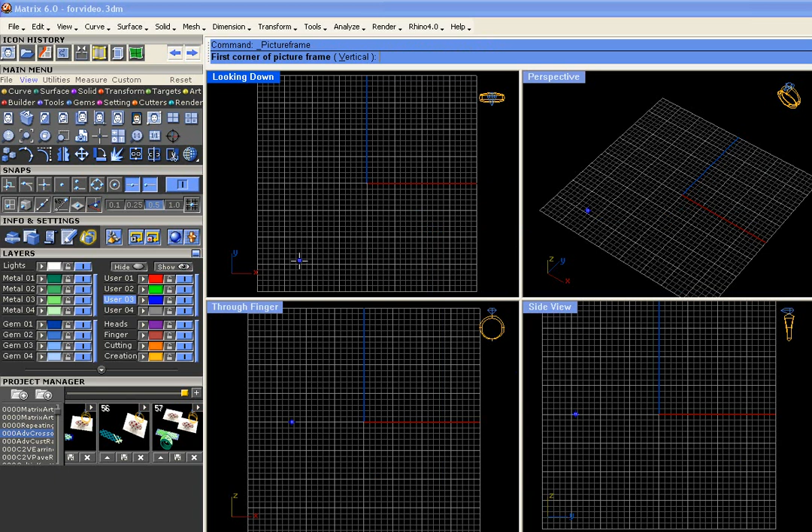Once you've found that image, hit open, and the next thing will be to click Shift and drag the bottom edge of that photo along. Then you'll be able to center this and scale it to the size of the actual ring so you get some idea of the size this should be.

So let's begin with the finger size, the finger rail, and then we can center this on the finger rail about 2 millimeters past the edges of it. That's actually not so bad.

Or if you prefer, you can just click and drag this off. The picture frame is a great tool to use because you can just pick up the surface and drag it around.

The only thing is I like to put it on a layer color I don't use a lot, such as lights, and then lock that layer. That way I can't accidentally select it.

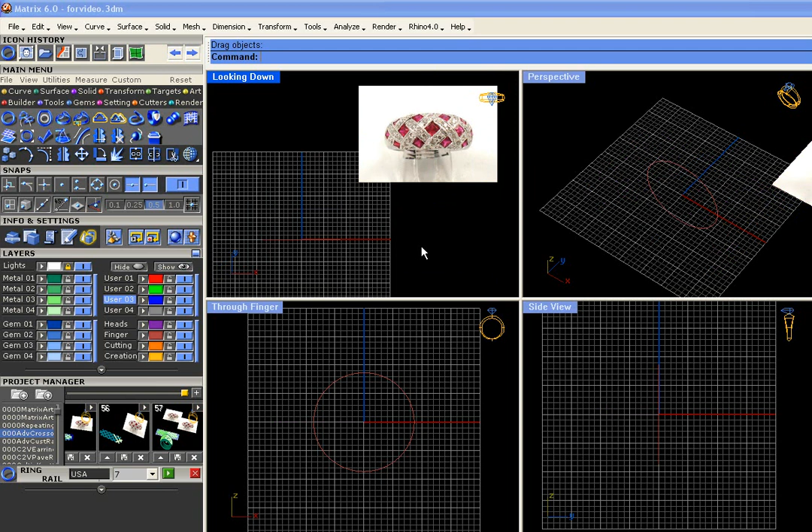To begin creating this, let's draw the taper for this ring in the side view. To start, I'm going to just place the curve tool line with the both sides option right at the inside of that finger rail.

As I hold down Shift, I'm going to drag this out to the width that I want at the bottom of the ring. I want it a little wider actually, so right click, both sides, click and drag that out.

The next thing is going to be to create this taper with the line tool. Just click into the end right here and extend it pretty far up past the top of this to the width you want for the ring.

F4, Shift. I just mirrored that to the other side using F4.

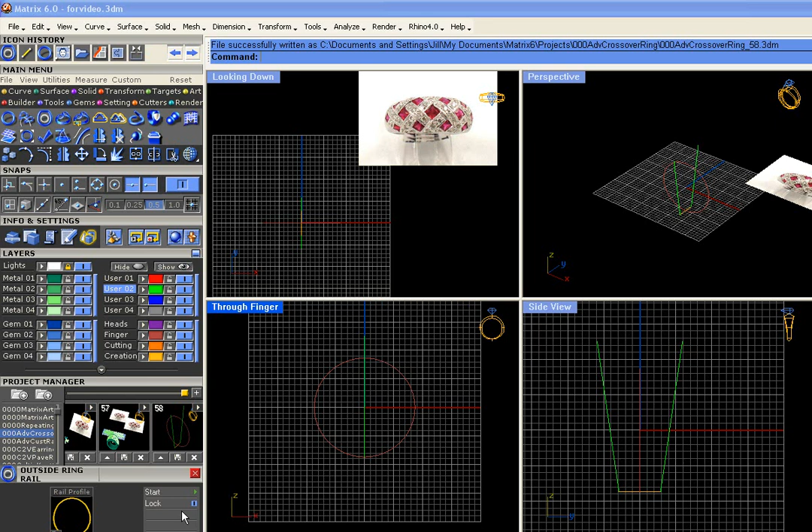The next thing will be to place the outside finger rail here. With the outside rail tool, just hit start and you'll get all the handles for that. We're actually going to just create the side of the ring using this.

So we're going to draw this up to 1.5, this down to 1.3, and the bottom up to 1 millimeter. Holding down Shift, you can get those right on. Okay, press Enter to keep that.

Using Curve from Two Views, we're going to be able to place the outside and inside finger rail on an angle with these two curves.

Before we do that, as you know, these curves have to extend down past the end of this rail, which they don't yet. So we're going to run the extend command. That lives right here in the curve menu. Just press Enter for dynamic extend.

We're going to extend this guy and this guy. What happened there is Rhino history is turned on, so when you extend one curve that has been mirrored, its mirrored copy also does the extend. So we can turn that off - it sometimes messes with matrix history.

Let's job bag this. Alright, Curve from Two Views is going to give us two curves that match the angle of the green lines there.

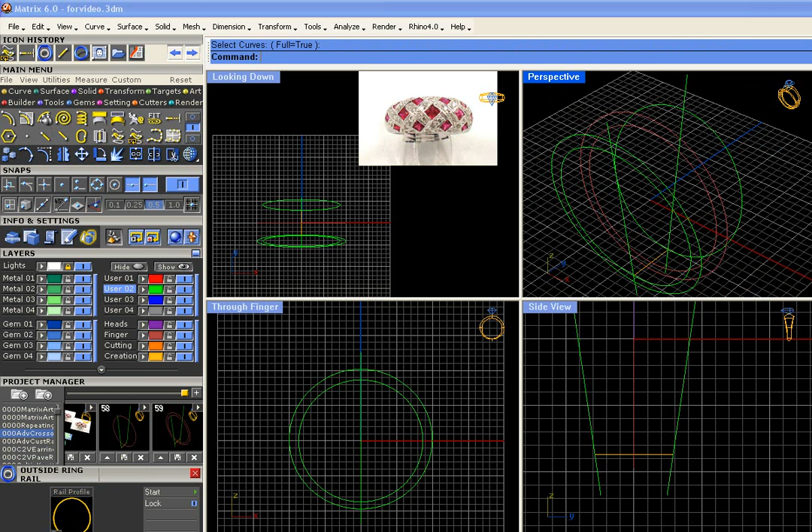So let's run Curve from Two Views with history with the inside finger rail and one line. Repeat the inside finger rail and the other line. Repeat the Curve from Two Views with the outside rail and the line, and one more time with the outside rail and the line.

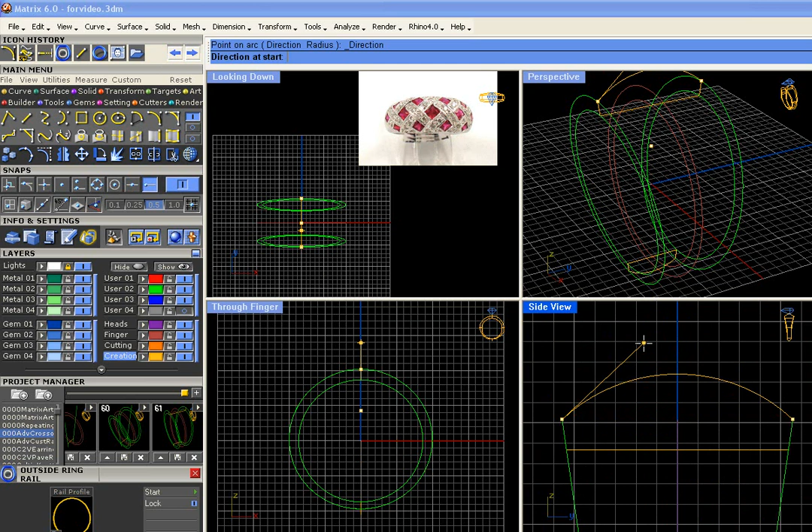Same thing at the top. Between the end and the end, we should have an end in there. And just draw that up as high as you want. In this way we can create a different curvature at the bottom as at the top. We want this to really poof up more at the top. In fact, we could even do that a little bit more and really get that thing tall and puffy at the top.

Okay, job bag this. Notice that we didn't join these profiles together. We're all ready to sweep them in 4 separate sweep 2 operations. This is exactly what multi-rail sweep does, only we're going to control it so that we get 4 separate surfaces in the end. So sweep 2 between the 2 rails and the profiles that touch them.

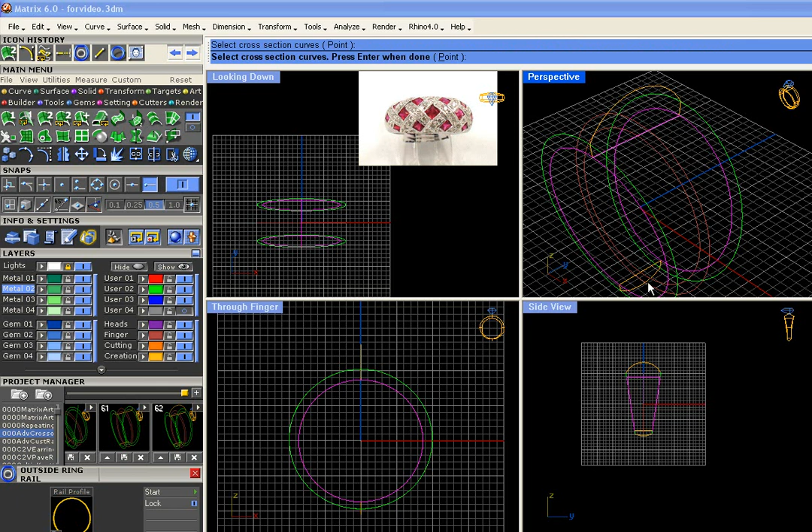Oh, we can mirror the whole thing afterwards anyway. Sweep 2 between the 2 rails and the profiles. We can mirror this guy. F4, shift. Sweep 2 one last time between the 2 rails. Sweep 2 between the 2 rails and the profiles that touch them.

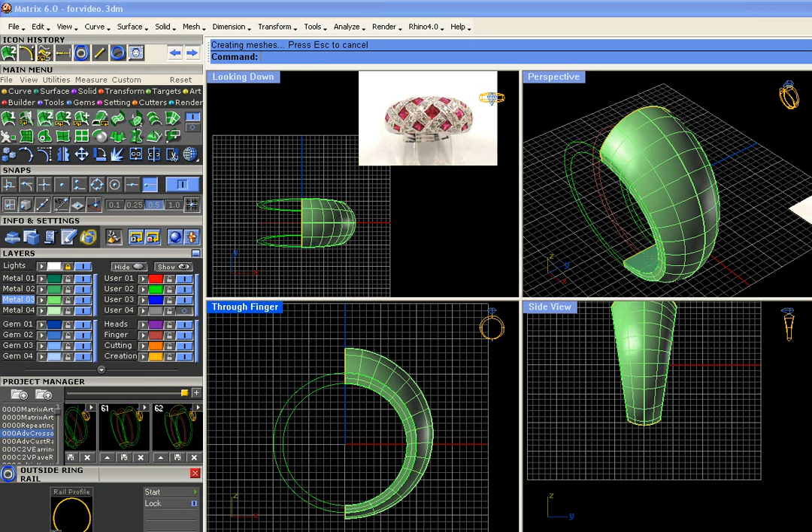Okay, you can see the really nice shape of that. And we can take all these surfaces, join them up, and mirror them to the other side of the ring. F4, shift, and join everything together. It should create for you a closed solid poly surface if you join the inside. I forgot to mirror and join the inside.

Join your closed solid poly surface. Okay, get used to that. We're going to be checking for that a lot during this tutorial. It's a pretty tricky one.

Remember how I said I like to keep those curves around? Let's bring them back right now. They're right here, and we'll offset them to create a shape for the inset surface that all this stuff is going to go onto. Let's offset these one at a time. If you're not sure exactly how far you want them, just use the 3-point option, and when it looks good, click.

You can either mirror this or just offset the other one. We'll mirror it, and we'll put them on another layer color so you can see them really well. Cutting layer. Also determine how far down the ring you want that little surface to end.

With the line tool, and making sure project is turned on, because we're going to draw this straight, flat in the viewport, just draw about the shape for that. Notice how it comes to a V here on the side. Trust me, it comes to a V on the side. And go ahead and mirror this one, F4, shift.

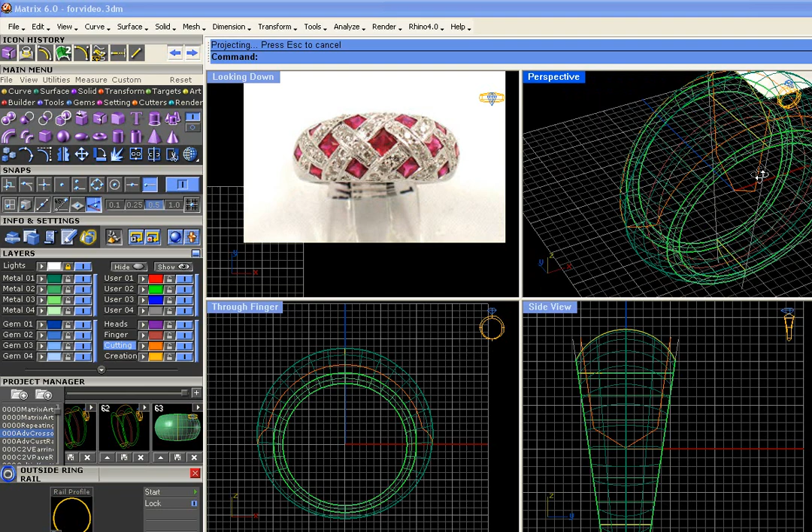In the side view, we're going to run project, grab our orange curve, press enter. The surface to project it onto is this green one. Press enter, and there we go. You can see that it projects around the entire surface.

We're now going to split the green surface with the orange curve. One surface has been split into two pieces - there's one piece and there's the other. Let's take that first piece and put it on a new layer color so we can get a good look at it.

Now we're going to scale this down in order to create the inset surface. Let's select just this surface, run the transform command, scale 2D, and then looking down from F4, we're just going to click shift and scale this down a little ways.

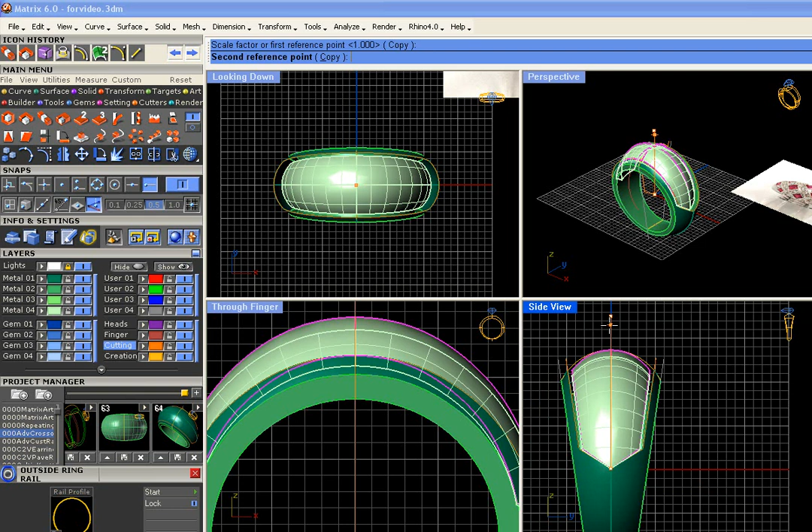Notice that it's scaling it smaller on the top and the sides, which is good, but the very top of the surface is still all the way up at the top of the ring. So we use 1D scale from the end snap and just scale that down, making sure you're holding down shift so it doesn't make things go out of whack here.

Then just depending on how you want this to look, you can finagle it a little more. We're just creating an inset that all this stuff is going to be put onto, so all this stuff is going to be just about planar with the top of that ring, so you're not going to see this really weird shape on the side. Of course, you don't see it here - we're just making a surface to flow this whole design and lay these gems out on, so you don't have to really worry about that so much.

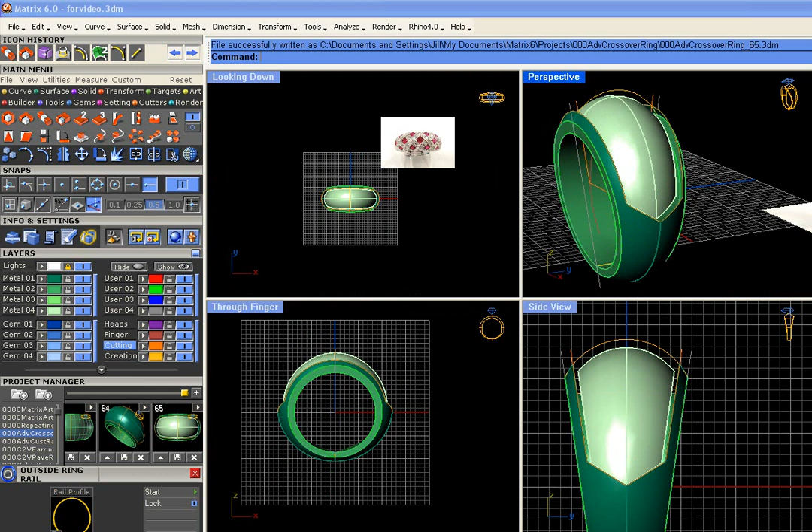So let's leave it all uniform there. Let's job bag this. And to create this as a solid model so that we don't get all lazy here, we're just going to close it up with the loft tool.

So with yet another layer color, go to the loft command and just work your way around the edges that line up. Okay, and we'll go around this whole ring, lofting between these edges. Oops, not that edge, this edge.

Okay, I'm just going to pause the video while I do this because it's boring. Oh, that was so boring. I almost put myself to sleep.

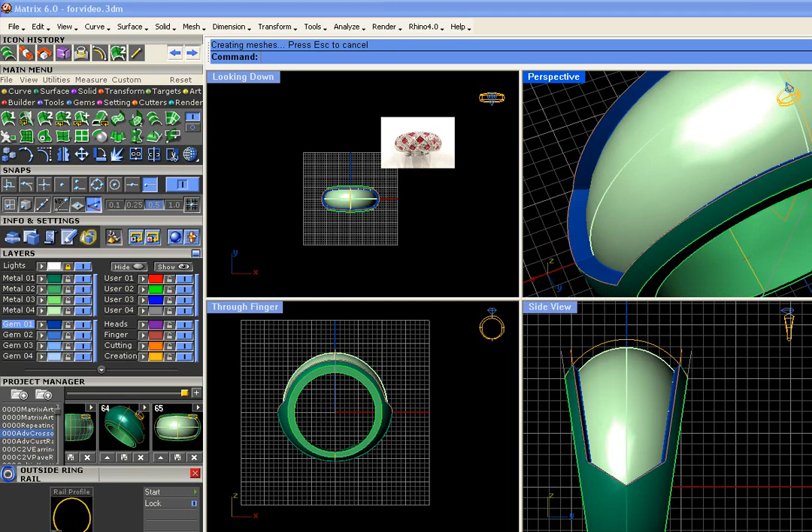Okay, so just notice that all the edges are lofted - they're little surfaces. Just don't get lazy and mirror these; make sure you build them all because you want this model to be solid in the end.

So let's grab all these, and all these. Does anyone else have trouble telling between those two shades of green? And join.

Okay, we're definitely missing a green. Join. And check it out - it's closed. That's good to know.

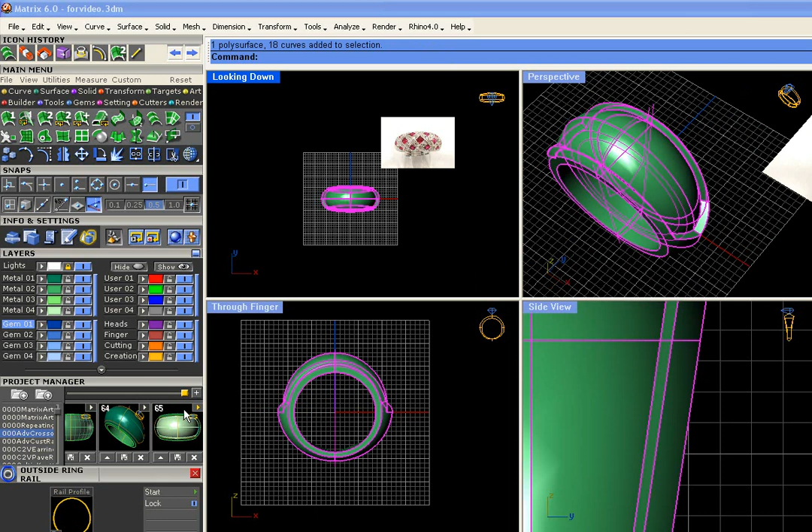And we'll job bag this. Okay, however, this is not the surface that we're going to flow this design onto, because we need an untrimmed surface for those little UV curve commands, and this one has been trimmed.

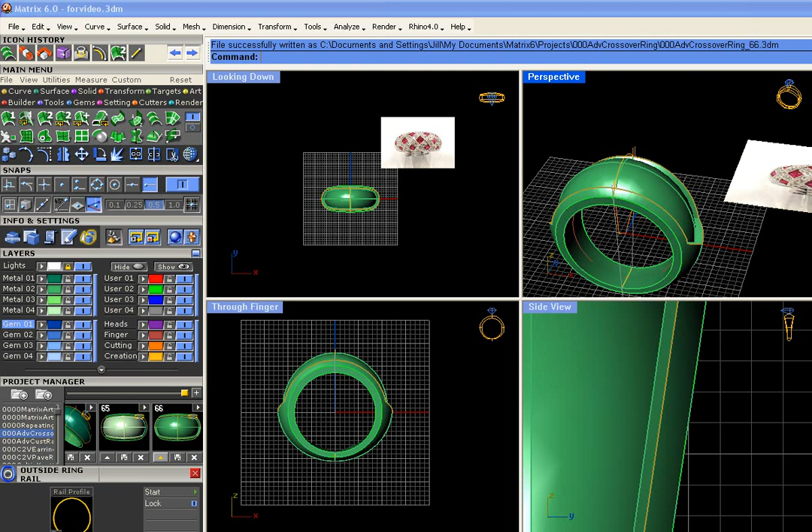It's been split, moved around, scaled. The split did the trimming, and it's just got no recollection of its original - how it's got no relationship to how it was originally created. So we need to create it anew, kind of here.

Okay, so we're going to do that. How are we going to do that again? We're going to do that by extracting the surface first - something we haven't used yet here. Extract our surface. And remember, we have four, so even worse - UV curves would not like that. Okay, extract them. Enter.

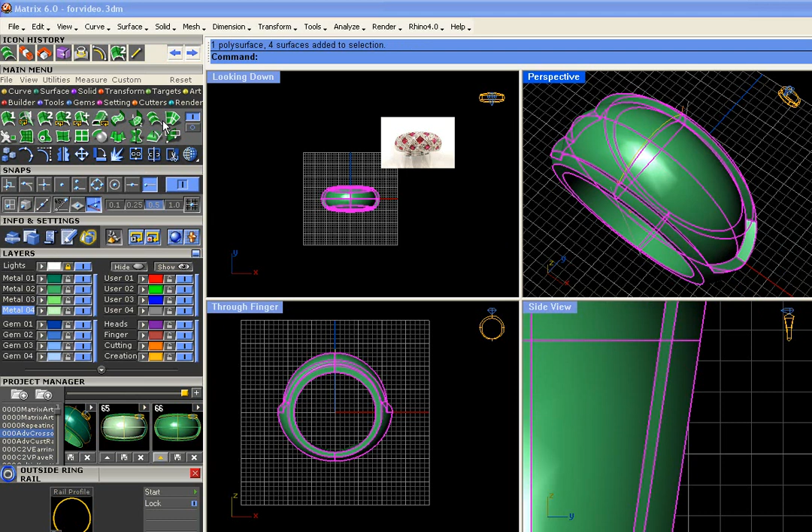We're going to run the dupe in place trick again. In place - we're going to take one copy and stick it on this color. And the other copy, let's take them and join them. And the other ones we're going to join up and create our poly surface again.

Okay, so we've got our ring kind of untouched there, and we've also got the surface that we're going to use to build the new surface. So let's turn off the ring.

Oh, we've got a bunch of curves all hanging around out there. I like this super select tool - we can grab all the curves now that we're done with them, put them in a job bag, and dump them. We're not going to need them back.

Okay. We could also put this guy in a job bag all by himself, just in case anything happens and we crash.

And I think we've job bagged the whole thing. Am I paranoid? Little bit.

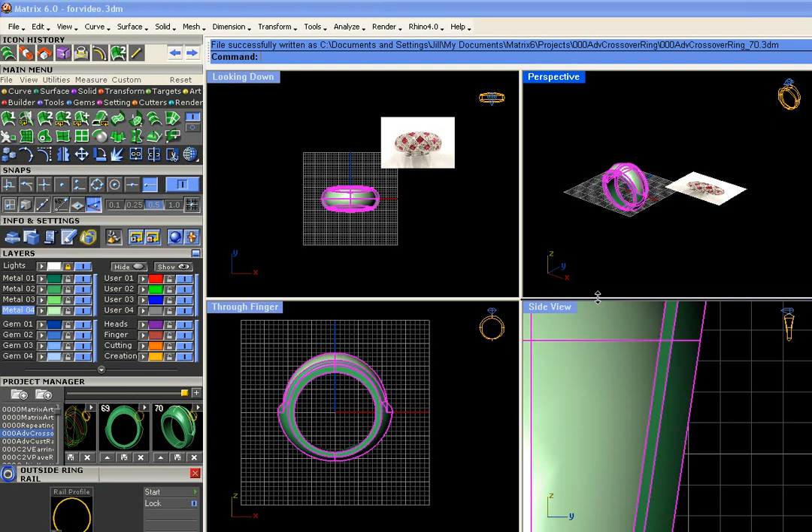Okay, turn this off. So here he is, and he's a poly surface, and he's been trimmed, and he's got all kinds of things going on that don't work with our UV curve demands here. So we're going to select this.

We're going to run the duplicate border tool. We don't get rid of it yet - in a second we're going to get rid of the old one. But before we get rid of it, we're actually going to explode it and join one half and join the other half.

And what I'm looking to do is get a curve right here. So let's dupe edge right along this edge. Enter, join.

If you hadn't noticed, extract iso curve doesn't really like to do that. But we do want to use extract iso curve on the side of the surface right here and snap it to the end. And do the same thing over here.

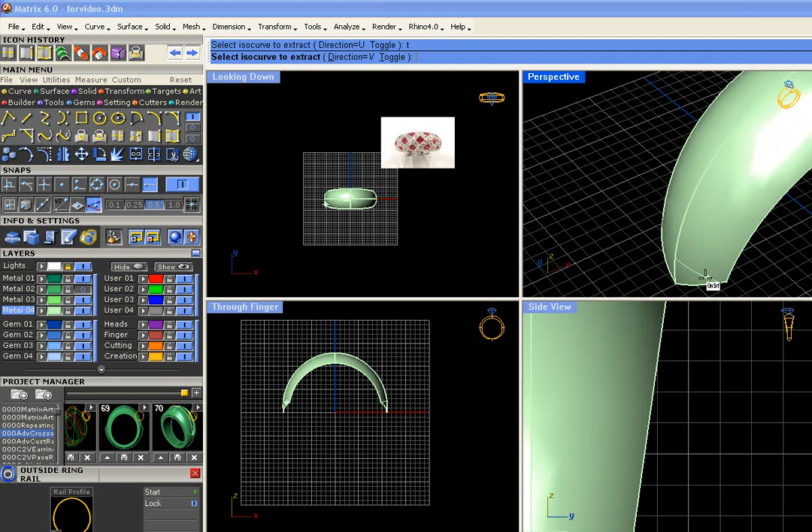And yet again right here. Oh well, toggle please - right to the end. And finally on the other side right here.

Here are all the little building blocks that are going to make us our new surface. So let's take this guy and explode him, and we'll join up the two sides. Same thing over here.

And we'll join these profiles so we have a single profile from it. Actually, we technically only need to do this on one half of the ring. That's okay.

And we'll go ahead and sweep this. Sweep 2 with our 2 rails and our 3 profiles. Okay, there's a very pretty surface. There he is, he's looking good.

Now you'll notice that these things hang out here, and we want to know where they are so that we know where the ring catches up with the design we're going to place onto the inset part of the surface. So that's what these 2 curves tell us. But notice that this does not extend down past them, and we want it to.

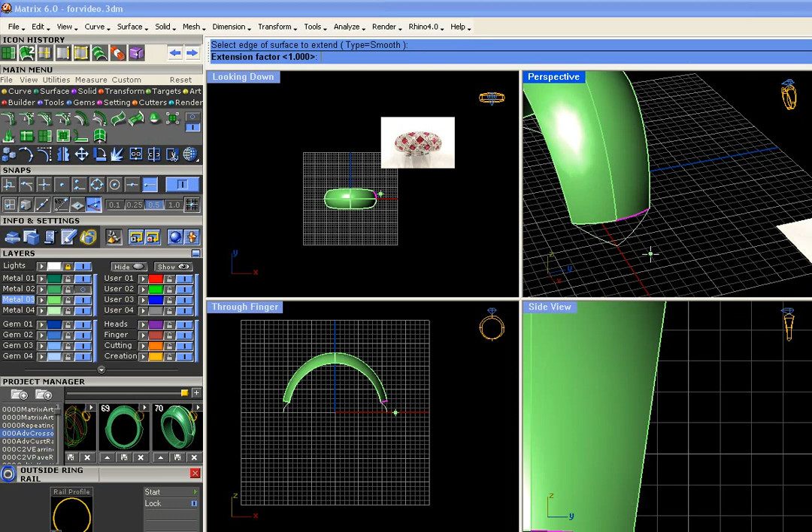So we're going to run the extend surface command. I finally found a use for this. Extend surface - here's the edge to extend. Okay, and notice that we have our poly surface again.

This is a good mistake for you guys to see, because look, it exploded into all these different surfaces, and that's not what I wanted. So we're going to rebuild all the curves.

And since this is only going to be a cripple surface, it's not a surface we're going to keep - it just needs to closely reflect this ring. Remember, we have him right here. We're going to lay all this stuff up on the ring. As long as it intersects, it'll Boolean to the ring, as long as it intersects and it's valid and closed. So we're assuming you need these closed, solid, good poly surfaces.

Okay, now what was I saying? Oh yes, rebuild, rebuild. Okay, let's do this one more time. Sweep 2. Profile, profile, profile.

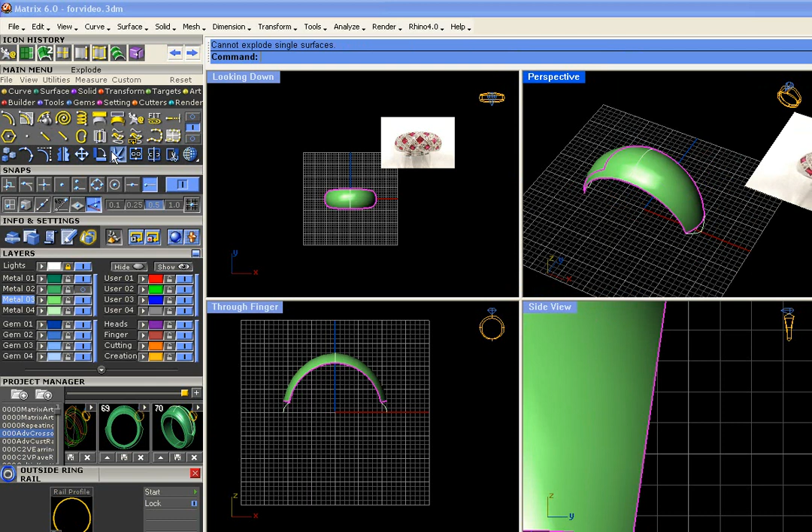Now let's see if this guy will explode. Nope - ah, so nice. Okay, as I was saying, we're going to go ahead and extend this down past our little V curves here because we need to get a representation of these onto the UV curve. So the surface has to be longer than that.

And remember, it's not going to mesh perfectly with this, but that's okay. We just need something that's going to lay up on there and that we can get it to intersect the original model so we can Boolean it and all will be right with the world.

All right, so we're going to extend the surface. There he is. And the extension factor - don't ask me if this is in millimeters, I really don't know, I just extend things. The extension factor that works is the one I use. So there's our edge to extend.

We'll use 3. Okay, as long as it goes down past those curves, we're going to do the same thing on the other side. Extend, 3, enter.

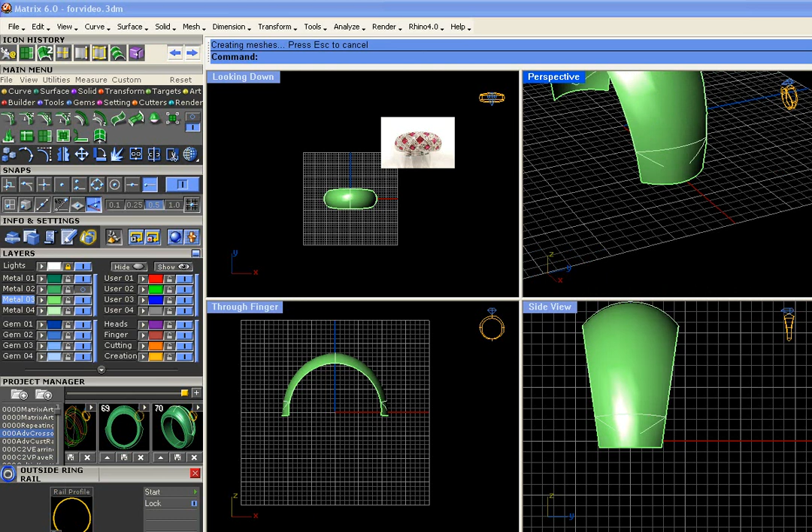And we need to get these curves onto that surface. We only know about a billion ways to do that, but I'm going to use pullback because they aren't necessarily on one side of the surface - it would just be a mess. Pullback can do it from either side here.

So curve, pull back to the surface. Enter. And there it is - you've got one on the surface. Run it again, pull back.

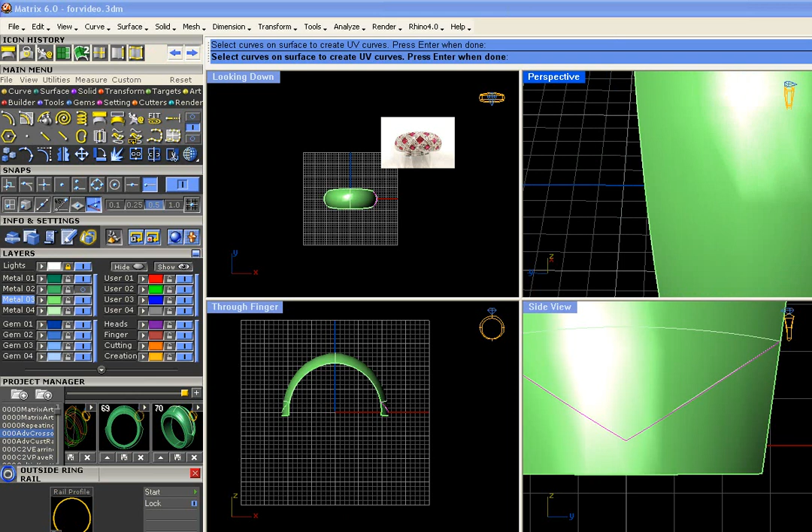There he is. He's beautiful, he's gorgeous. Look at you, look what you did. Well, I guess I did it, but I'm sure yours looks even better.

Okay, you have a representation of the surface together with the area on the original ring that the surface is going to creep in. So you've just created a pretty tough UV curve surface.

Not an easy task. Speaking of not an easy task, let's figure out how the X's all lay out to make the lattice work. This only took me about 27 tries, probably literally 27 tries. Okay, starting from the notch in the V here, we're going to run the line tool.

Is this a straight line? Yeah. Okay, starting from the notch in the V, we're going to run line to both sides. And with the intersection, it's going to stop when he reaches the UV curve box. And we're going to mirror this around the middle, somewhere here of our box.

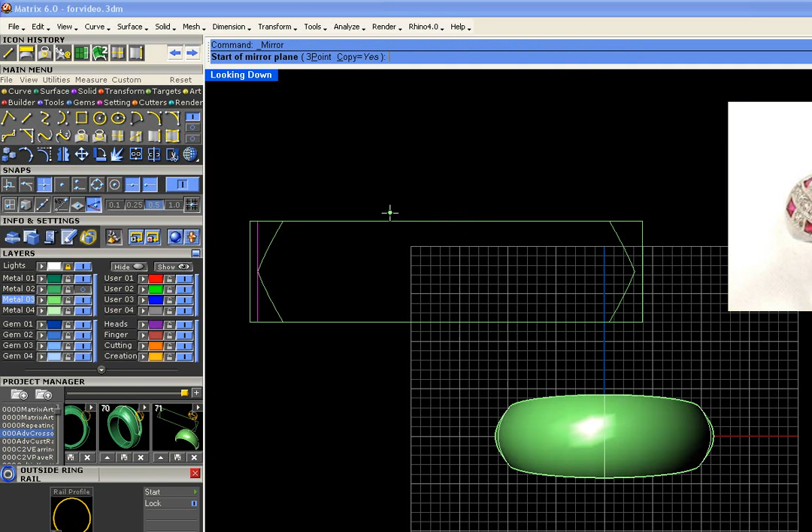Hopefully that's all good and mirrored. If it's not, we'll be paying for it later. Make it 28 times, okay.

I'm going to explode. Ooh, before I do that, very, very bad. Take just the UV curves box here, just this thing. Run the duplicate with the in place option.

Okay, you've got a copy on top of a copy right now. Put it on another layer color and turn it off. We're gonna have to get those back later. Better yet, job bag it all by itself so you can get back to it when you need it. Okay, good.

Now turn it off. Okay, now we're going to explode this box. We're going to split the top and bottom, split them with the 2 curves on either side.

Okay, and these are the only curves we're going to use to worry about the X's. We don't need this extra stuff here. Okay, don't ask me how it works, it just works.

We're going to run the divide curve command on these. Divide curve 12 times. Same thing on the bottom.

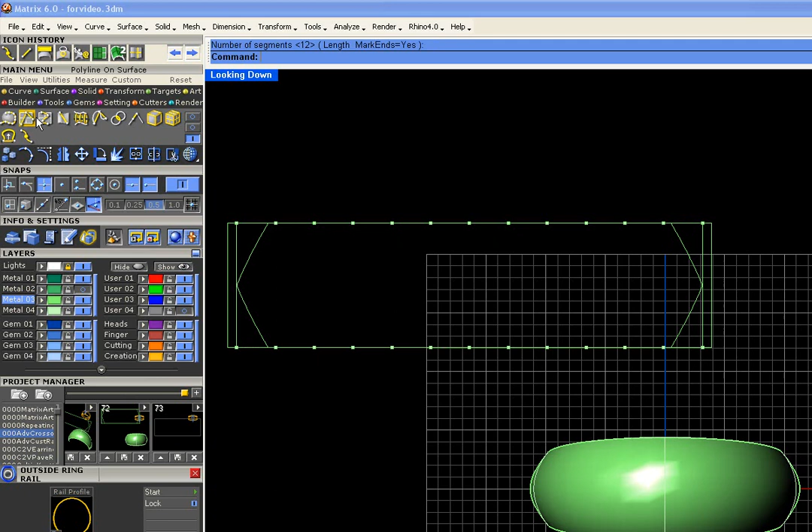Okay, we need to know the midpoint of this. Draw yourself a line to help you out with that. Okay, I think it's time for a new layer color. I'm going to grab a new layer color.

And using the line tool, we're going to make an X. I usually mess this up, so don't laugh. We're going to mirror the X around the midpoint.

And we're going to drag this off center, because notice at the very center - oh, you can't see that, it's off your screen. There he is.

The very center of your ring is not the crossover of the X, it's the diamond shape where the two X's intersect. So we're going to just click and drag this off center using our point snap to drag it one click away. Delete the other one.

Okay, now this we're going to mirror and see if we did it right. Ooh, 27 tries actually gets you something.

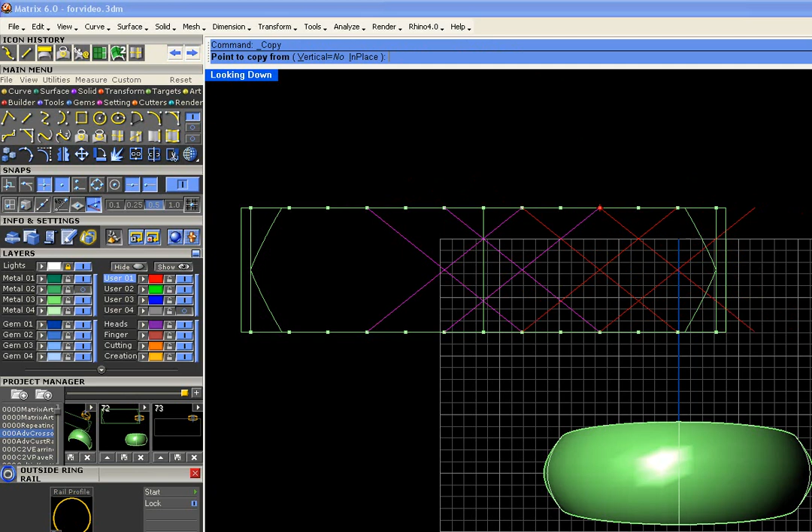And just copy this, and copy it again, till you got something that looks like this. I really stink at that, so if it takes you 27 tries, you don't have to feel bad.

All right, let's jump back this since I don't want to have to do that again. And the next order of business is to offset these and create the thickness between each of the X's here.

So we can run offset, and just offset this a distance that you think is going to be good for your design. We're going to run both sides. Okay, this is about 0.8. Just depends on if you want those fatter, thinner, or whatever.

Okay, when you do this, offset both sides. This is going to take me forever, and again, will be boring, so let me pause you. Welcome back, I'm all done.

Okay, notice that these do not intersect their ends on all of these. They sort of stick out wildly, and that would be bad if we tried to trim everything together. Yes, it would. Okay, trying to think if that's true or if I'm lying.

That's true. All right, so let's go ahead and extend everything to touch the outside of the box. To do this, we select the extend command. Our boundary is this, this,

and this, this, and this. Enter, and the curves to extend are all these little guys that don't reach. Don't reach, don't reach, don't reach. I'll let you watch this, it's so interesting to watch me click.

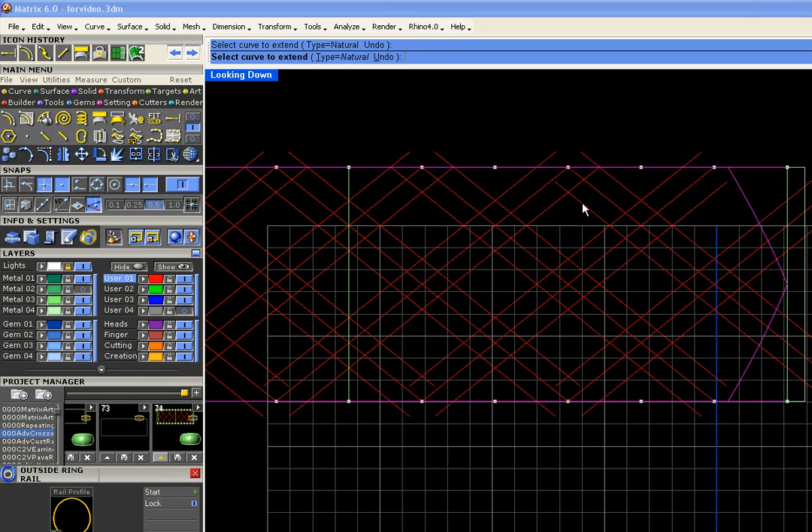I heard rumors of popcorn. I'm a little bit upset that nobody shares this popcorn with me.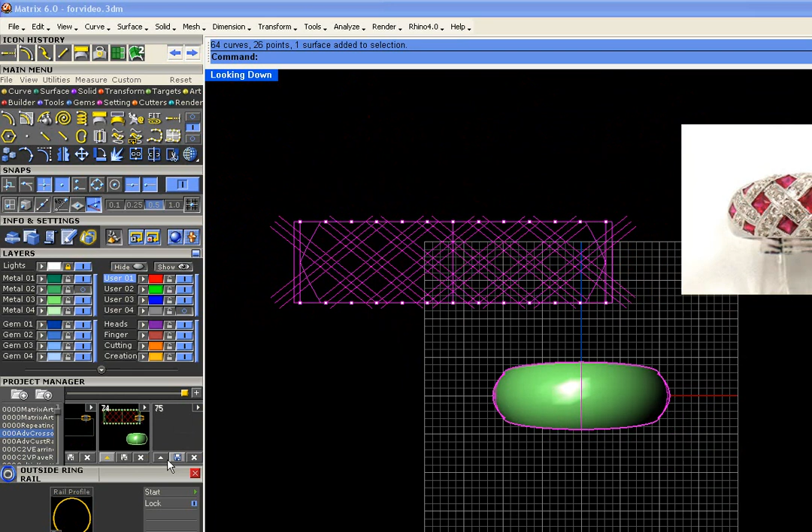All right, there we go. Press enter when you're done. That command likes to hold on and come back and haunt you. So again, we will jump back. Okay, so everything's extended to intersect to the ends of this design.

The first thing we're going to do is extrude this design, so we have to trim everything out first. We don't need these original offset curves, so I'm going to grab them all. I was thinking I probably would have stuck them on a new layer color. Grab them all—I feel so bad deleting them. Put them on gray and turn them off. The other thing is to get all those point objects.

Do the same thing. And the final thing will be... just wipe it all. Oh wait, I know—we need the curves as they are right now, just as they look. So we're going to right click them all, duplicate in place, as you know, my favorite trick. Put them on a new layer color we haven't used yet and turn that off. Okay, that leaves us a copy of blue and a copy on red.

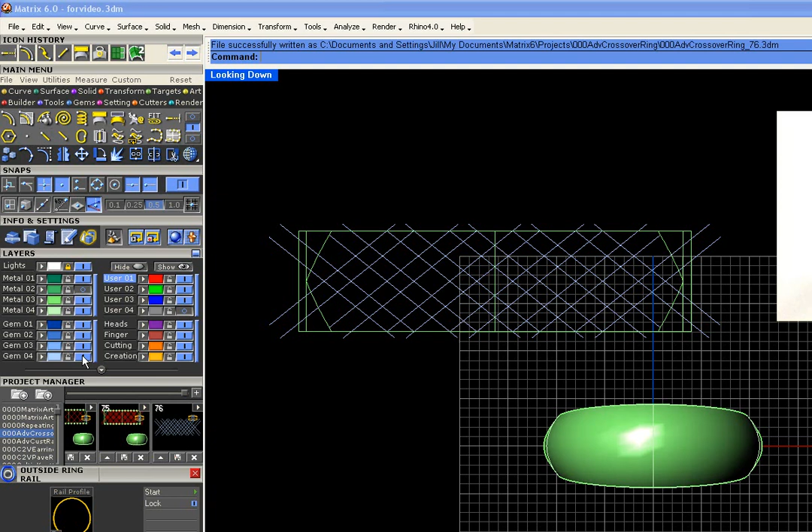We're going to need those blue ones back, so remember those are there. In fact, better yet—job bag them. Okay, turn them off. Let's grab everything and trim away.

Again, this is going to be exceedingly boring, but I'll let you watch it for a little while. Just make sure—right click—that after you do a couple of these, if you mess up, right click, you won't have to undo them all. It just ends the trim command and then starts it back up again. Wonderful trick from my friend Christopher Stokes. Great guy. Right click, right click.

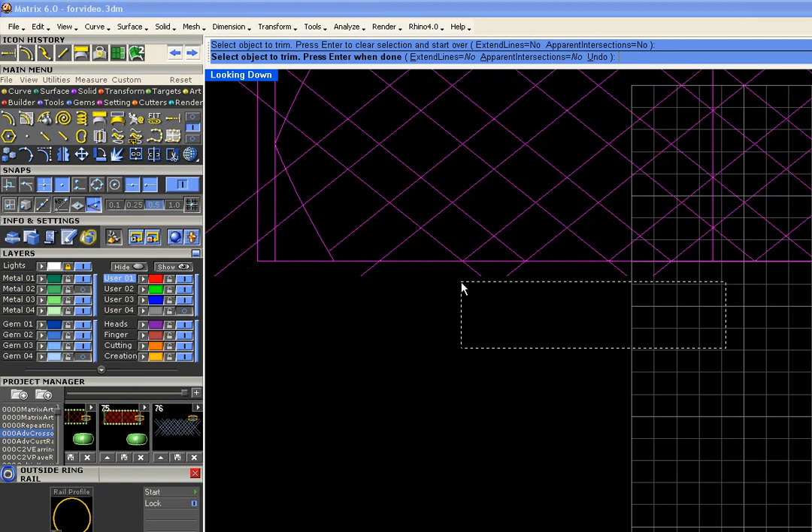Oops, it's the little things when you're using this program. I found a new way to trim—I was happy beyond reason. That should tell you something. Trim, trim, trim. Same thing over here, and get rid of everything that's not that little ziggy, zaggy shape, since that's where our guy is going to end.

Right click, right click. Oops, another guy we don't need—we could stick him on gray and turn him off too. Okay, grab it all again, trim. This is the part I'm bad at: find the negative space and trim it out.

Oh, I get batty just looking at these. Negative, positive, negative, positive, negative. Okay, I'm going to put this on pause for you. And welcome back—don't you wish it went that quick in real life? Okay, hopefully there's no extra stuff.

Here's a good thing to do: grab your super select and look for duplicate objects. If it's not up there, you don't have any. Okay, so let's grab them all and join them—15 closed curves. We'll trust that.

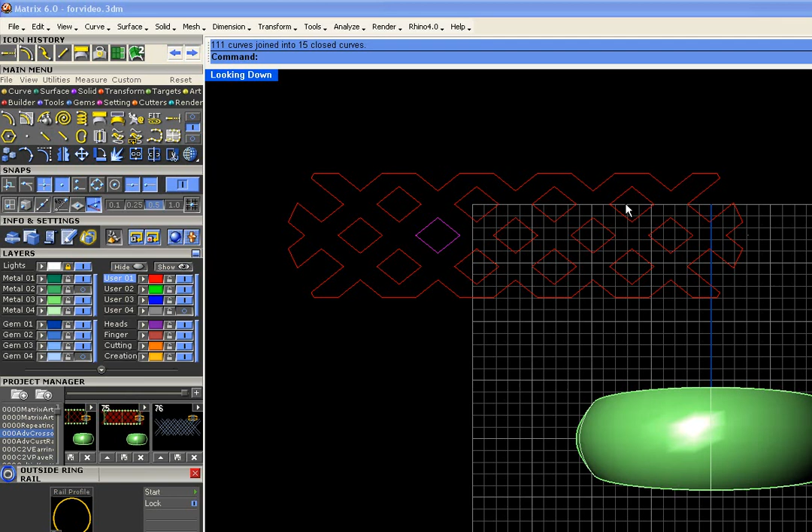Something else that's good to do: if you're not sure you got it right, click on all the big major curves that you know are good and correct. Move them out of the way. Now go back and grab one curve, add to selection. Do you even see it?

That might be it—oh, that's a mean curve. He hates us, delete him. That often happens. It can screw up your model, because when we grab that thing and it tries to extrude it, it just makes an ugly, big old fat mess. So that one you can get free of charge.

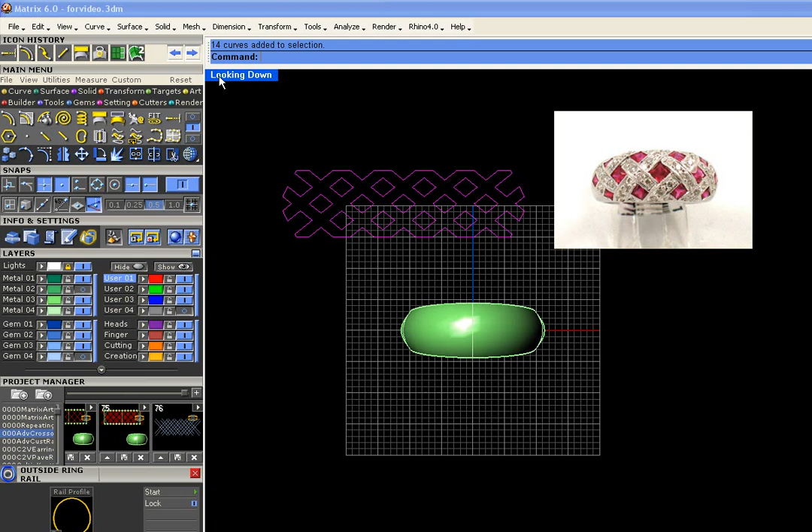All right, let's go ahead and extrude this and make our little solid—I hope, we'll knock on wood. We're going to extrude it straight down, so when those other curves come back, they come back over the top of it. So let's take a look. Straight down. Boom.

Nice. If you really care to, you can grab this and check: closed, valid, 110 surfaces. That's good to know. And job bag it, of course, naturally.

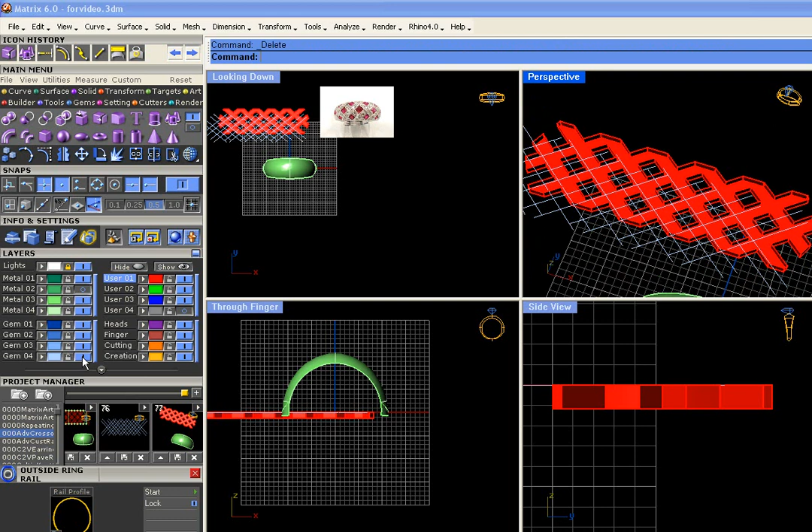Now we don't need the cap of this—we're going to make our own cap with an over-under design, a very swanky little thing. So extract the surface from the top, delete it, and you've got just the sides and the bottom left. And that's fine. We're going to bring back all those curves, which no longer touch.

Oh, that's not very good. Move that—but we found our little demon curve, didn't we? Let's find the places where they line up. I suppose there are any. We can do this, we can do this. Okay.

There's our UV curves box—see, aren't you glad you put stuff on gray and turned it off? Where's the corner of that box? We need those green curves back; those we did not duplicate, those are lost and gone forever. There should be a midpoint around here somewhere.

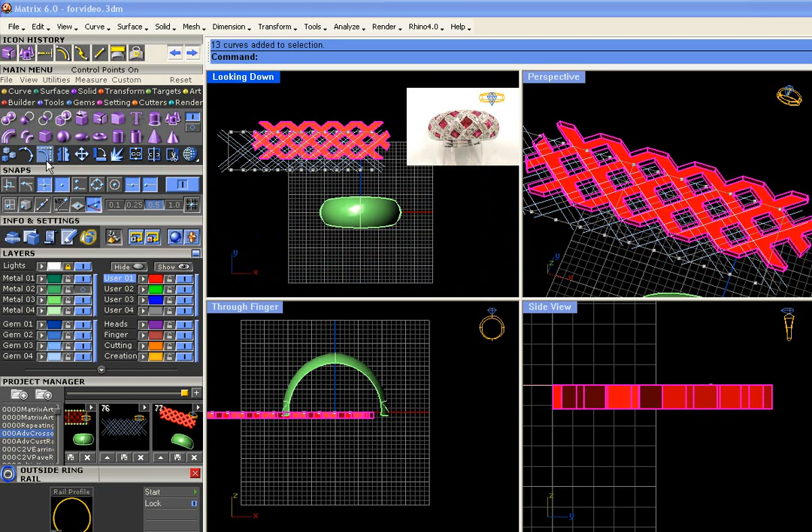Oh yeah, we missed some stuff. Right click to grab all the red. Don't do this, it's not part of the tutorial—it's part of me being clumsy.

This is a good lesson in why not to be clumsy. Okay, I think it's all lined up again. If it's not, we'll know, we'll hear about it soon. We'll trust the O-snaps—the O-snaps are our friends.

Okay, turn off gray. Our next order of business is, believe it or not, we're going to make some profiles to sweep along these rails.

Let's make them. I like to make them in the top viewport. We can turn on our grid snaps and grab the rectangle tool with the rounded option. All the grid snaps are still on, but if you want to see them, okay. Just make ourselves a little guy, something like that, so we can get some gems on there.

I'm going to use the cutting layer and split this with this. Delete what I don't need. Duplicate this in place—you knew I would do that. Stick our second copy on another layer.

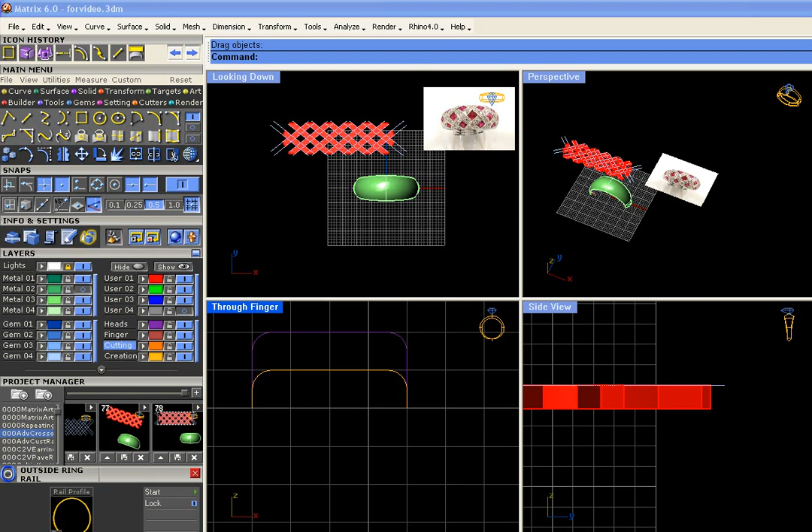Take Mr. Number 2 here and grab some of his control points. Straight up they go with Shift. Okay, escape. Now we have Mr. Under and Mr. Over, and they're going to come and help us finish off our lovely over-under lattice pattern here.

Let's start with Mr. Under—let's figure out where he goes first. The one I like best is this one, that's the one that jumps out at me when I see this design. So there's the center of our box, we're looking at this guy right here.

We have over and under. Going this way is the under. So turn off that box again. Orient 2 points is what gets those profiles up there. Turn off our grid snaps—that'll help a lot. End and end are our reference points.

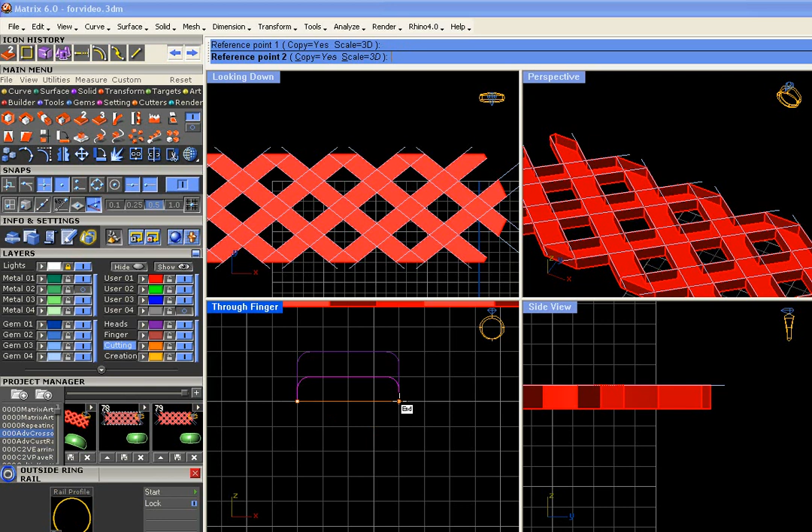Do you remember where he was? Right there, okay, and he's Mr. Under right here. With the near O-snap on, we're going to go right at the middle of the crisscross and just—you can eyeball this, it's going to come out. Enter. So there he is, Mr. Under. Let's do Mr. Over.

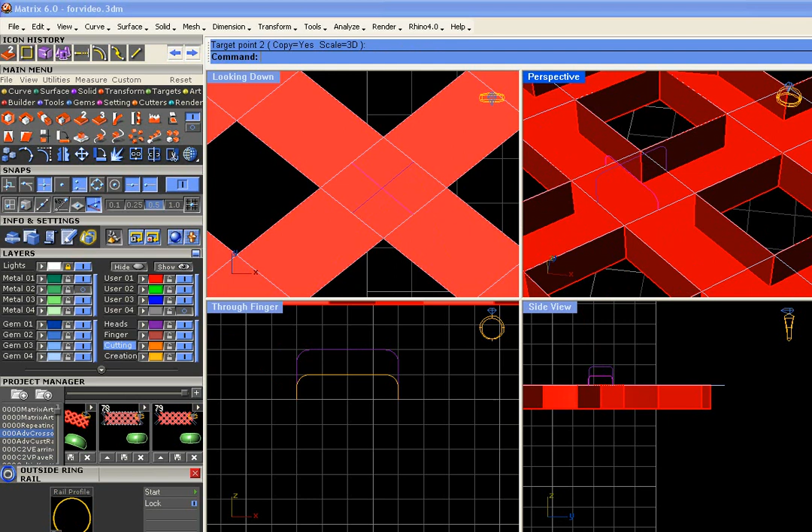Orient 2 points to the end and the near, going in the opposite direction. Again, these can just be—you don't have to get right on the near and the perp, they just need to look perpendicular. Now, we're not going to do this 80 million times because that's boring.

We're going to copy at the intersection of each of these ends, and if it helps you, turn off the red and just use the intersection O-snap, because then you don't have like 50 things to snap to. These are the same all the way along, so just copy them to the next intersection O-snap. There you go. We'll do the same thing at the next X with Mr. Over and Mr. Under.

The next one up here, and you can tell over goes to under. So orient 2 points, end to end, and end to end. Enter. Same thing at this guy, end to end, and end to end. Enter. Now, these are all the same too, so we copy.

Here, here, here, here, here. And you know what, copy—they're the same down here too. Thank goodness.

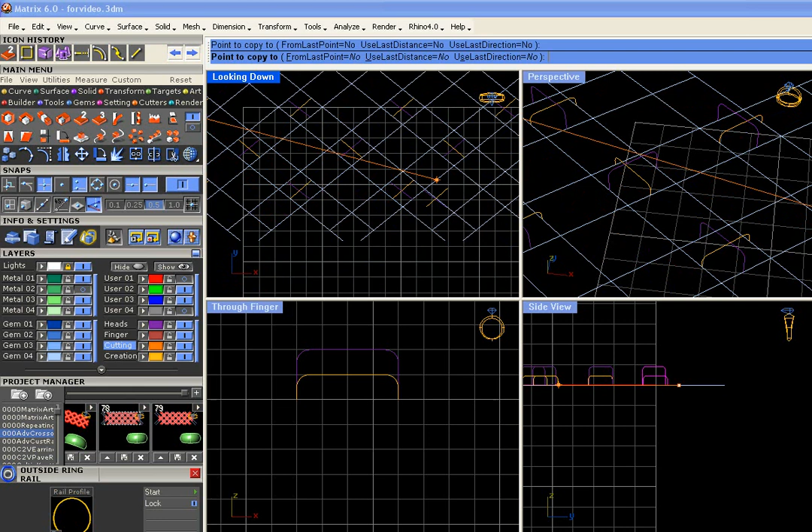Aren't you glad we have the Celtic knot builder? You'd have to do this for a lot more complicated designs if we didn't. Oh right, the ends we're going to let sort themselves out—yes, the ends we don't worry about, okay?

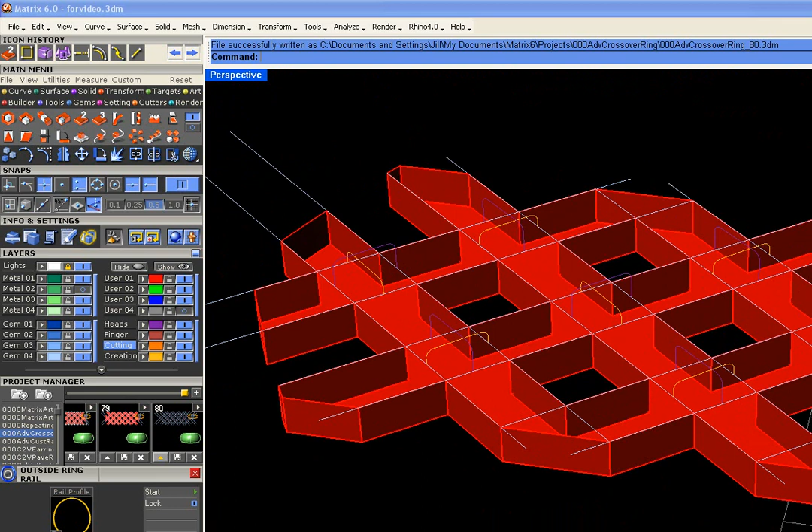But we are going to bring back the surface, the poly surface. As we sweep these, it's going to come from a straight line up, up, and back down to a straight line. So the edge of the poly surface right here, how it lets you grab the poly surface edge, that's going to be one of our profiles.

To make the profile on the other end, we're going to split these two curves with one another and make this a profile. We have to go through and do that each time. This is also incredibly boring, but I'll show you a couple of them before I pause the video.

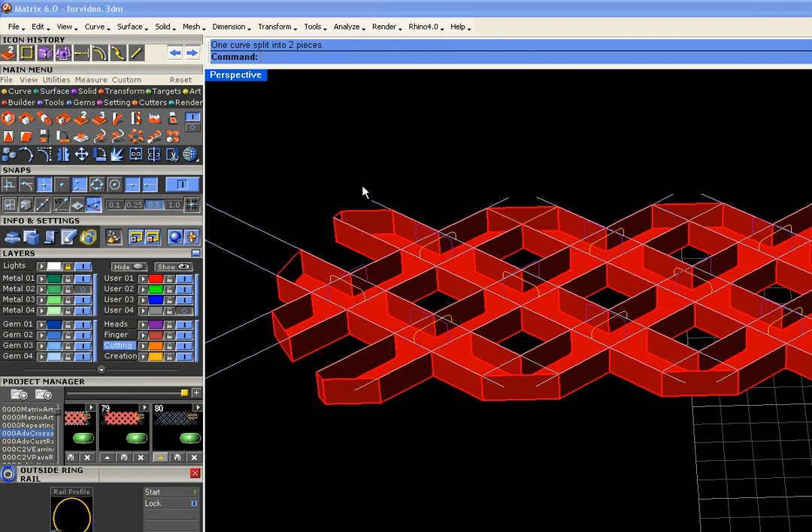Split—split this guy with this guy and split his neighbor with the first one. Enter. And you get two little—if you feel so inclined, you can put them on a profile color. It's always fun. Same thing down here.

Split with you. Enter. And you split with you. Okay, again, two little lines, put them on a profile color.

I'll just show you how to sweep a couple of these and then I'll pause because it's really boring. Okay, grab a nice layer color, sweep two.

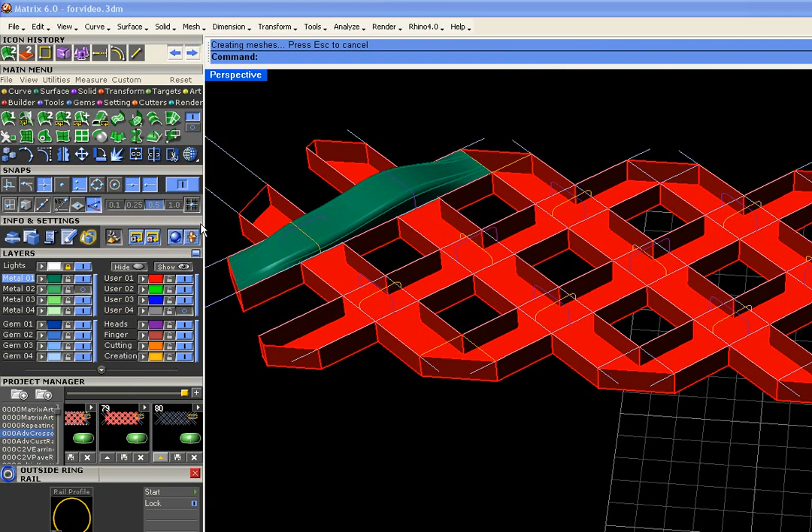Here are your rails. Profile is the edge, the profile, and the one you just split to make a profile. Loop, to better see that, we'll run it again. Sweep two, with our two rails, our profile edge, the profiles that run perpendicular to those two rails, and the last little guy we split away there.

Okay, and you just do that ad nauseum. I mean, 27 more times. Pause. And we're back, that was a little time consuming.

So here's our swept surfaces. The only thing that's missing, and we'll show you how to complete them both, are the little triangles at the ends here, and at last this interesting shape. We'll tackle this one first.

We'll just go ahead and draw a line with the end snap-on from the end to the end. We'll then just sweep it like a regular sweep two, the way we've been doing all along. Okay.

And I'll complete that on each of the four ends. You want to see another one? I'll just do one more.

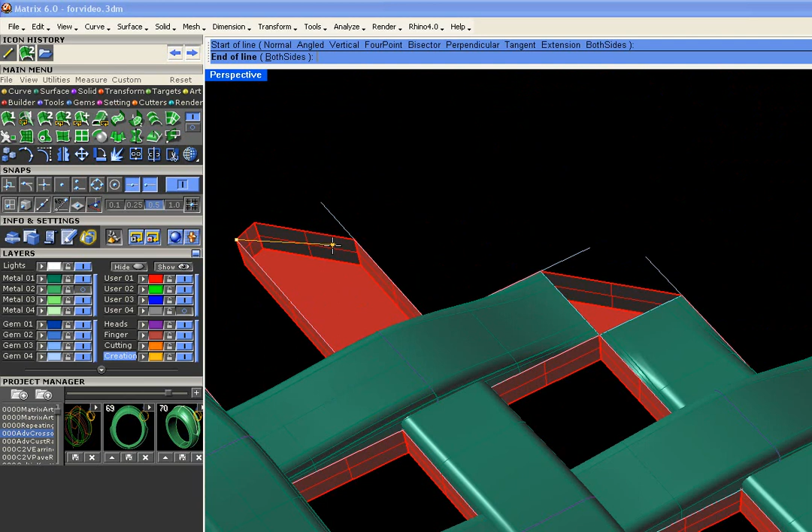End to end, that becomes a profile. We have sweep two along the two edges, between the profile and the new profile. Okay, helps if you put that on the layer color you want active. I'll finish these and I'll be right back.

All right, we've got all those taken care of. The last order of business is to cap each of these ends, and we can use surface from planar curves with all three little guys, and just form a bunch of caps using any of the edge curves from these surfaces.

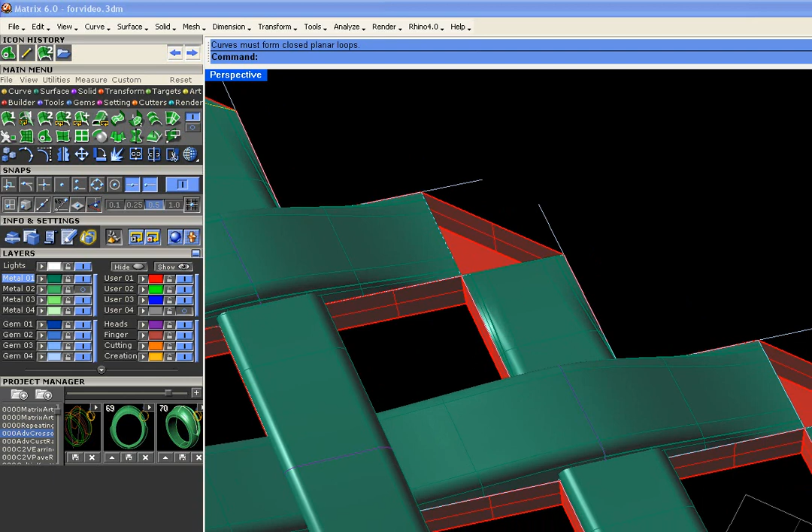If you use the edge curves, or the curves they came from, whichever one works. And if surface from planar curves doesn't work, try your edge curves. Use the curves and the edge of the surface. Okay, and that's fine, edge curves is great. Curve, curve, and edge.

And just kill off these little guys. Okay, we'll be right back. Okay, with all those done, at this point right now you have to resist the urge to join all this up.

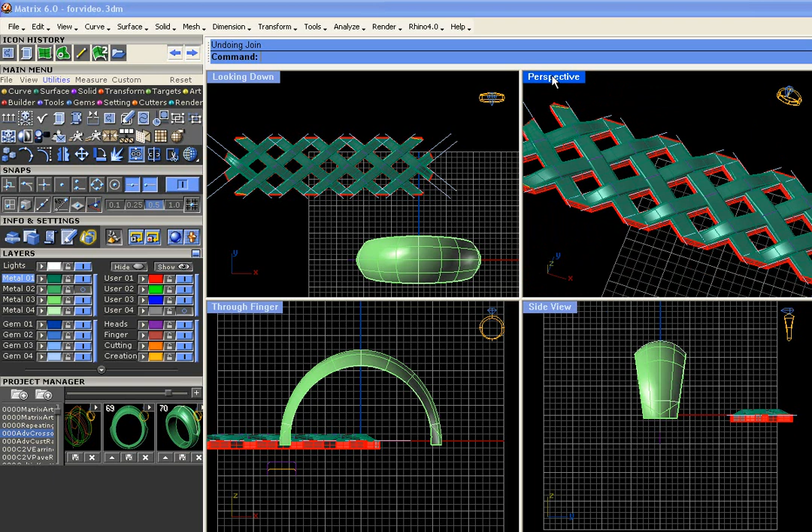Our next order of business is to split the surfaces with one another so that we get rid of all the intervening sections. See this part where it intersects? That part is no good to us. So let's turn off the red.

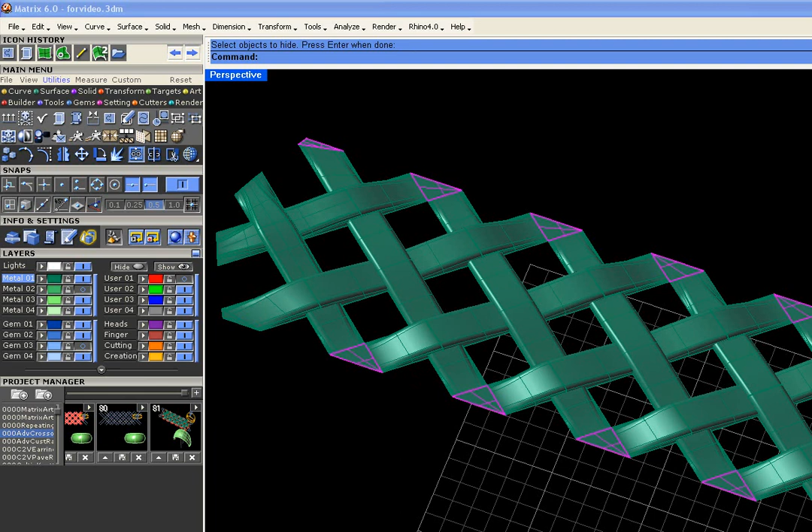Sorry about that, restarted the hide command somehow. Love it when that happens. Put them on red and turn them off. Okay.

And this method uses our layers. So we're going to select all of one object and put it onto a new layer color that isn't out there yet. Okay, we're going to select the layer color and we're going to split it with the surfaces that intersect it. Enter. Okay, now we have to take the surfaces that intersect and split it with everything on the new layer. Split, enter. Okay.

Now we're going to take everything we know is good, good, good, good, good, good, put it on another separate layer and turn that one off. And all the stuff that's left behind is the intersecting pieces. And when we turn back on that layer, there should be none of that junk left between them.

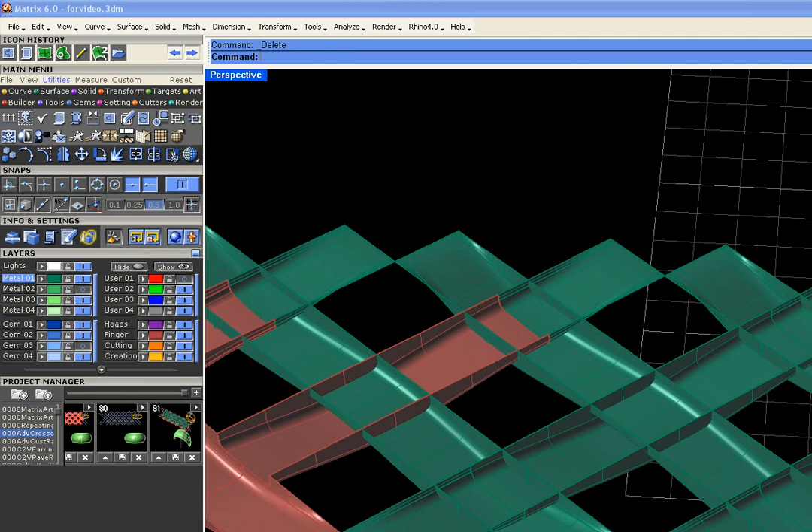It's always good to check so you can come in and delete that stuff when it is there. There'd be little intervening parts right in here if we didn't do this right. Instead we have openings showing that we did do it correctly. So there's one little section where we're good, we can join it up.

And we'll put it back onto our original color, and do this all over again. If you want, you can put that onto a separate color, so you're like, here's the good stuff. Do that all over again. Pick one of these to split.

Put it on a new color. Take the one you're going to split, select it, and split it with the stuff that intersects it. Enter. Now take all the stuff you just selected that intersects it and split it with, right click on everything on that layer. And the reason we do that is we need to grab all those little intervening pieces and use them as cutters. Enter.

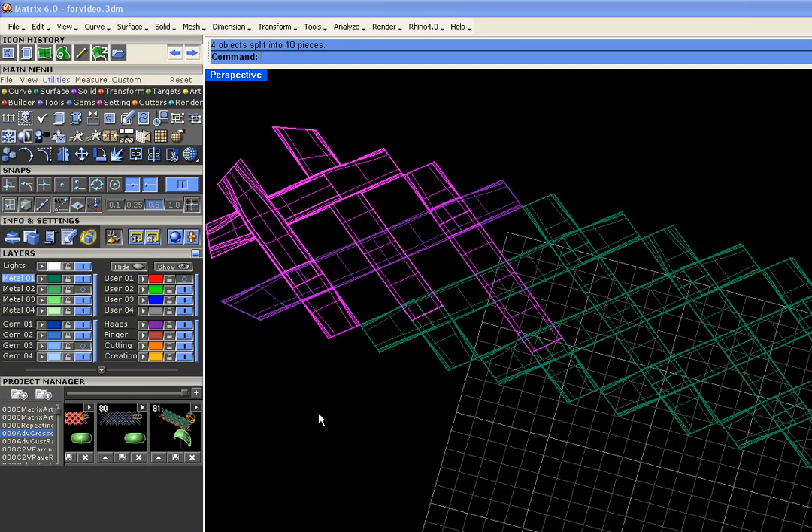Now we'll take all the stuff we know we're going to keep. Try to click pretty far away from where those little intervening pieces may be. Put it all onto a separate layer color, turn it off. And all the leftovers, junk.

One more time I'll show you, and then I'll do the rest of this by myself because it's really boring and lame. Actually, we should only have to do one half of this and mirror it, but we're not going to actually do that because we want to make sure everything still lines up with our original curves. We don't want to get things out of alignment or we get open, holey models. Not holy in a good way.

Put it on a new layer color and split it with all the stuff that crosses. Enter. Again, take all the stuff that crosses and split it with the new layer. Enter.

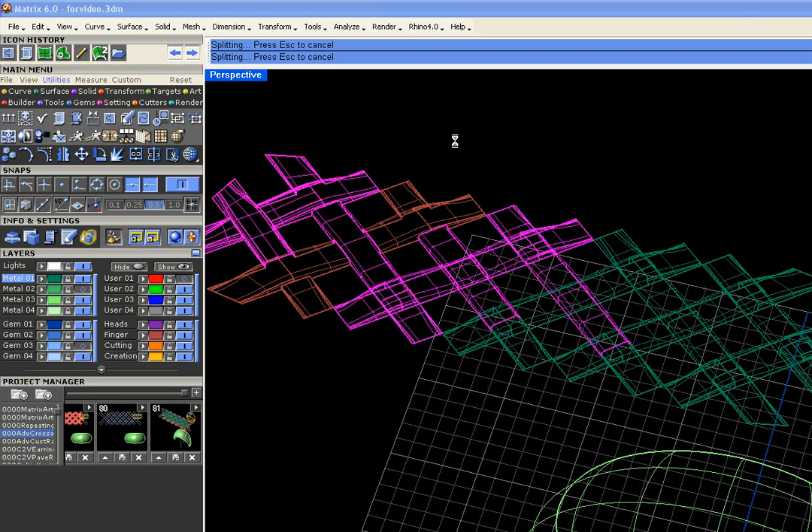Okay, select everything we know is good — good, good, good, good. That goes onto another layer and turn it off. And here's our junk, colorful junk. I'm going to check out for a minute while I finish this, and we'll be right back.

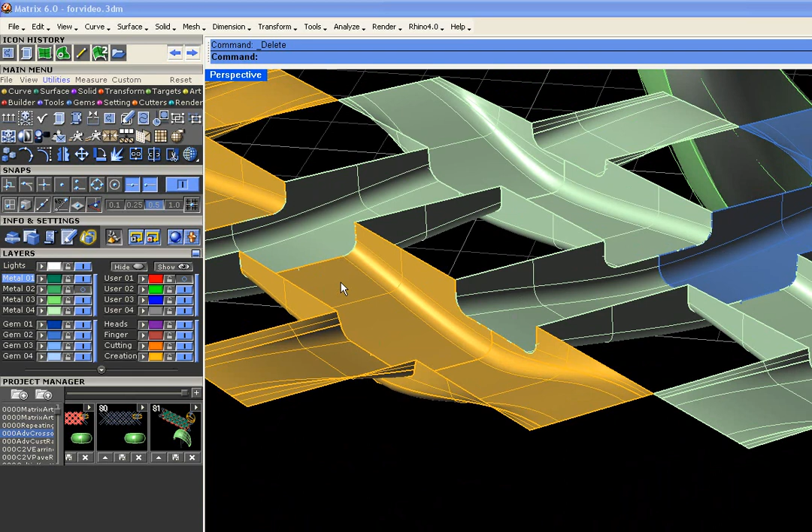And here is our colorful over-under lattice work. What I like to do is come through and check that every little opening doesn't have extra stuff sticking out in it. So all these little highways and byways should be perfectly garbage free, and they touch end on end. They were all used to split one another in our very careful little process back there, so they should all be good to go.

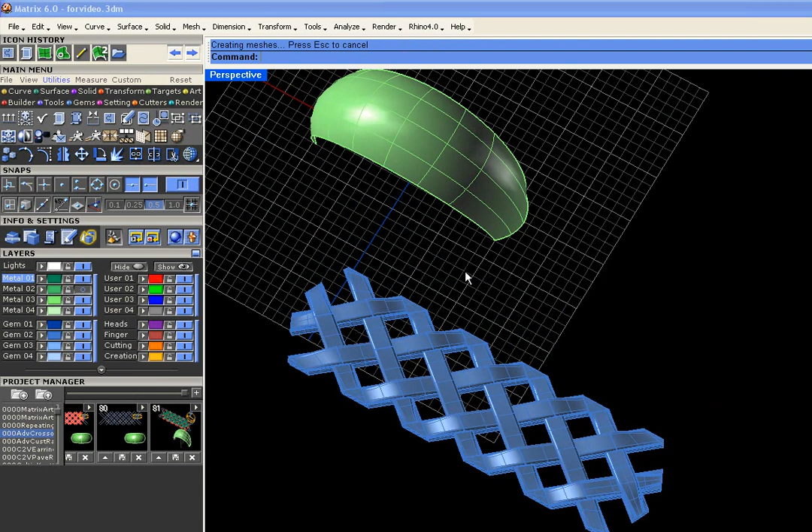Famous last words. Okay, so we can go ahead and select the whole colorful mess, join it. And likewise, we bring back the red surface, and we can take the red and the blue and join them together. We check, and we have joined them into one closed polysurface, which if I've tried this 27 times has happened one time. But luckily it was here in front of you. So I'm gonna go play the casino boats tonight.

All right, and we're ready to job bag this, especially a good thing to do. And we're ready to flow this up onto the surface. So what we need in order to flow this is we need those UV curves back from a million years ago, so we need everything back. We're going to hit show. Okay, and there's our ring, so everything's ready to go. And I'm going to job bag it at this stage here.

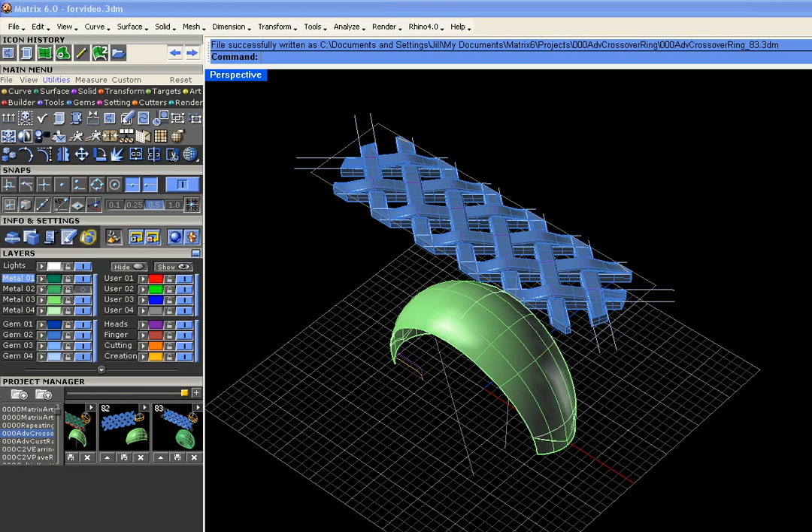Okay, we need to make the surface that is represented by this guy. Remember we extended him and we put the green curves down as UV curves, so we need these curves back. We need them right here to make a surface to represent this surface. So we're going to explode this into 4 segments, and we're going to use this to sweep — sweeping the long sides as rails and the short sides as profiles, so we have a sweep 2 between our rails and our profiles.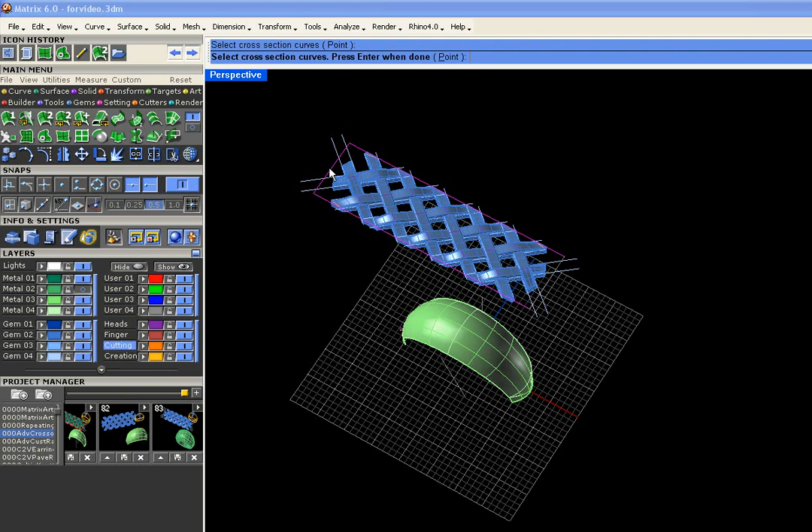And you kind of want this to be underneath your design to start with, so let's grab the orange and slide it down. We can adjust with history if we need to change its location. So here's our object to flow.

Transform menu, command Flow Along Surface. Our object to flow is the blue. Our base surface is the orange, and our target surface is the green. Select them at the same corner.

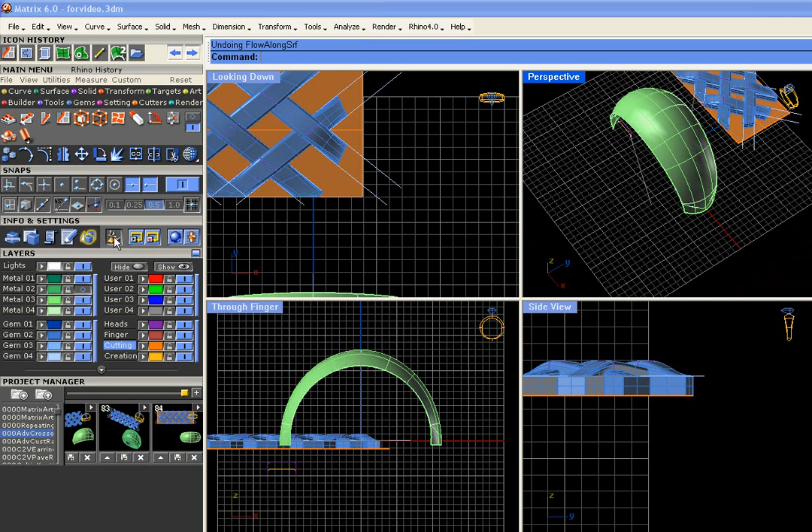This is going to happen quickly, maybe not such a big hurry, but because we didn't turn on history it goes a little faster. But we actually need history turned on so we can edit it afterward.

So undo, turn on history, and run Flow Along Surface again with our base and our target. Now they're in this history relationship, so we can make changes to the base objects and see them reflected in the target objects.

Let's take a look at the ring as a whole and see where we want this to be. Looks like it's up a little high, so we can start by sinking it down, and the relationship it has to this surface is the relationship it's going to have to our target surface. Let's slide it down and see what that gives us on our design.

You have to wait a minute, see how it's kind of stuck there. Okay, maybe it wants to be a little higher. But right now the look is up to you. The rest of this process and getting this design to look great is up to your preferences for that design.

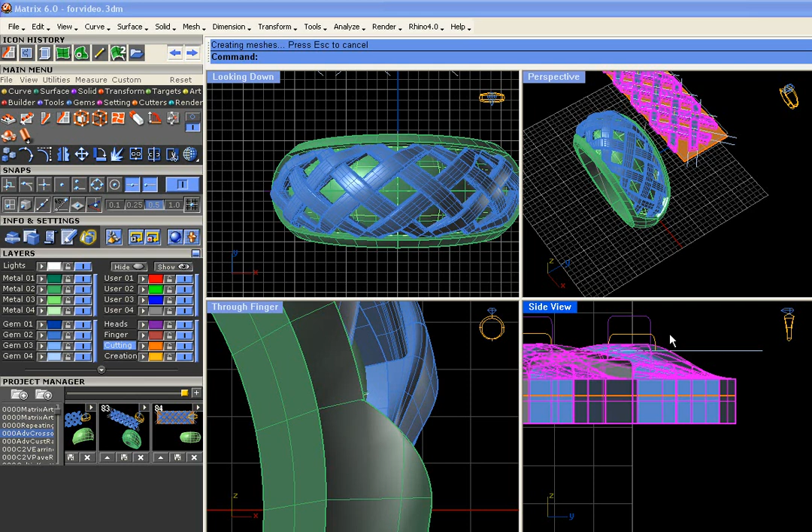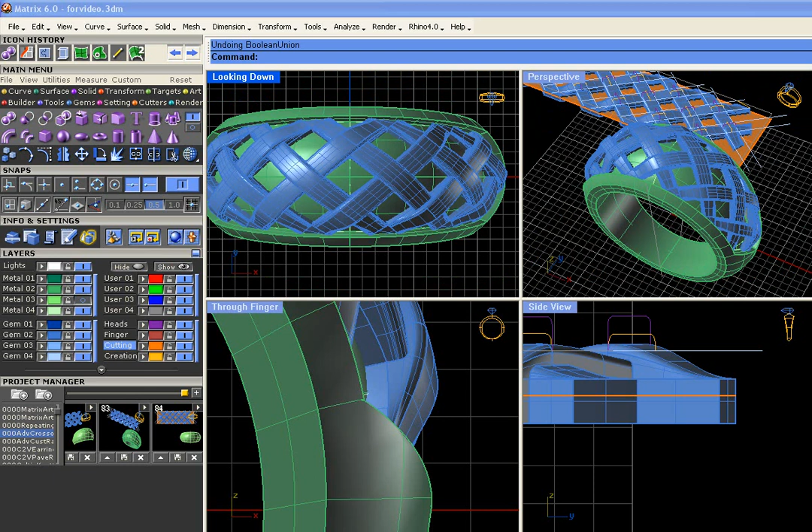Because this surface is sunken down into this one, if we're all done and ready to produce this model - obviously I didn't do the gems or the cutters, but you know how to do all that. This was the hard stuff. So we can actually Boolean union these surfaces together, and if you need a closed solid model out of this, you've got it.

The last thing I'm going to show you here is a little trick with the Gem on Surface tool to finish up placing gems onto this ring. So we're going to turn this off - I've job bagged it like 60 times, so don't worry.

And just get back your original surface. Oh, and we need that guy too. So before you Boolean it, go ahead and bring out just the lattice work, and the original surface is going to be easier to work on as a single surface instead of a poly surface. There's so many things for it to snap to anyway, and I find it just easier.

We're going to open up the Gem Loader. We're going to go to the size you think you might want for this design - got a 4.5 here. And you're just going to go ahead and rotate this. Actually, you can do this from right within Gem Loader.

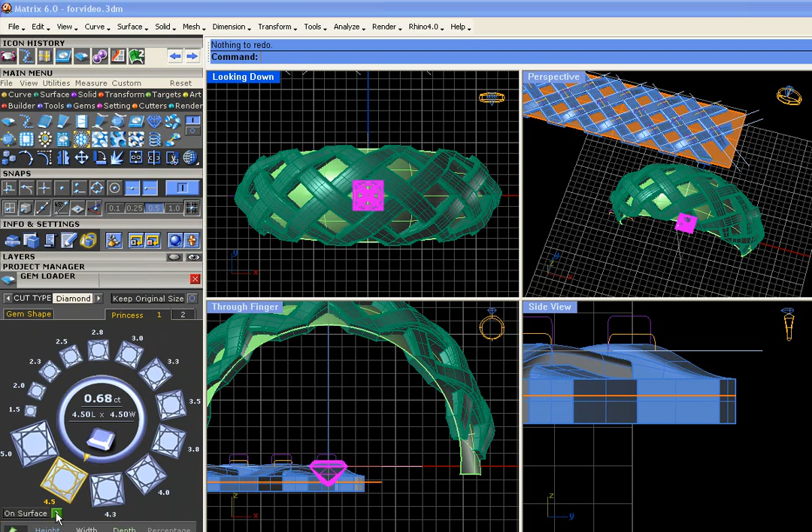Now, I already had it set up to the angle, but just type in 45 and press enter. Also make sure your scale's at 100% for the first one here, and just click to place it. You don't have to worry about the spacing because we're just going to do this by eye.

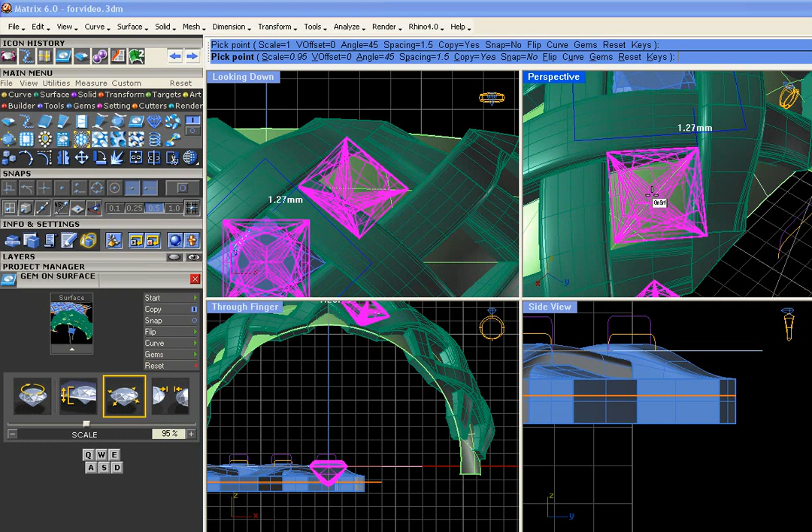This hole is a bit smaller because of the nature of the design, which tapers as it goes to the sides. So we're going to scale this down to 90% and see how that fits - 90% of the original size of the stone, maybe 95, so we don't have any unsightly holes. But you would just do this based on how you're going to set them, etc.

Because it's adhering to the surface, it's going to fill that spot really nicely, and we don't have to worry about how to get these up into this design. We can size this one down a little bit, 80% for right here, maybe 85.

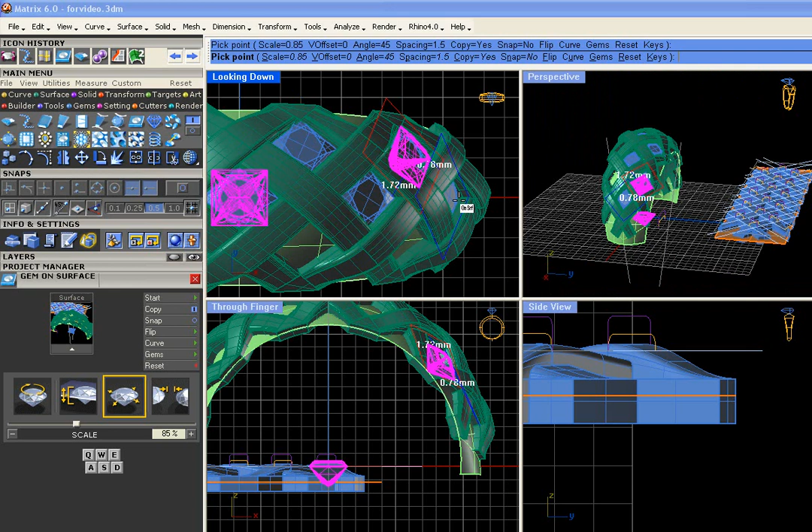Okay, we'll only do half, and of course the middle, because we can mirror everything. There's 13 gems total, so let's count: 1, 2, 3, 4, 5. No, it doesn't have one. 2, 3, 4, 5, 6, 7, and 6. Nope, it doesn't. Press enter when you're done.

Obviously you don't need that surface back, and you can Boolean union it just the same way we showed you before. Now you can make cutters for these and everything. It'll work fine. The other thing you can make cutters for, or however you're going to work on setting them, are the little stones.

Excuse me, that didn't come through, I just sneezed. I usually try to mute those.

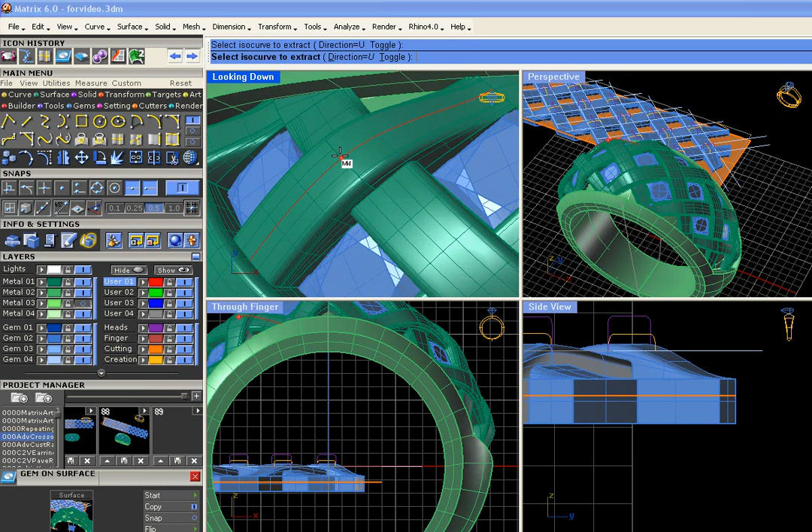Sorry. Go ahead and extract an isocurve right at the middle of these surfaces. We're only going to do one because this will take us all day again. So right at the middle of the surface, and join them together.

Guess if you really wanted to, you could fake it and go all the way down with that. That's not a bad idea, maybe we will finish this. You guys will be so sick of my voice.

And at the end here, okay. And we'll join, and we'll blend, just because this is easier than doing it a bunch of different times. And we'll take all the red and join.

And we'll place this into our gem on a curve tool. It might freak out a little bit. We'll see what this does.

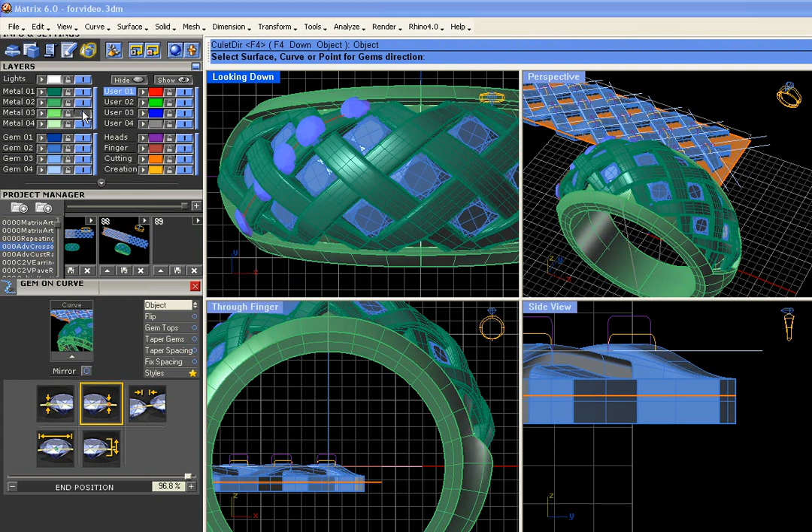These are obviously much too large, and they're also pointing right now at F4. So we want to choose object, and I think the ones over here might flip out a little, literally flip out. So again we'll go back to our trusty old original surface and tell them to point down at him. Ah, that's nice to have there.

Okay, scale these down, little bitty gems, and lower the spacing so you can get a few in there. Once you've got a little gem layout that you like, press enter.

And we'll grab these and go into the prong adder tool. Stick them in the box.

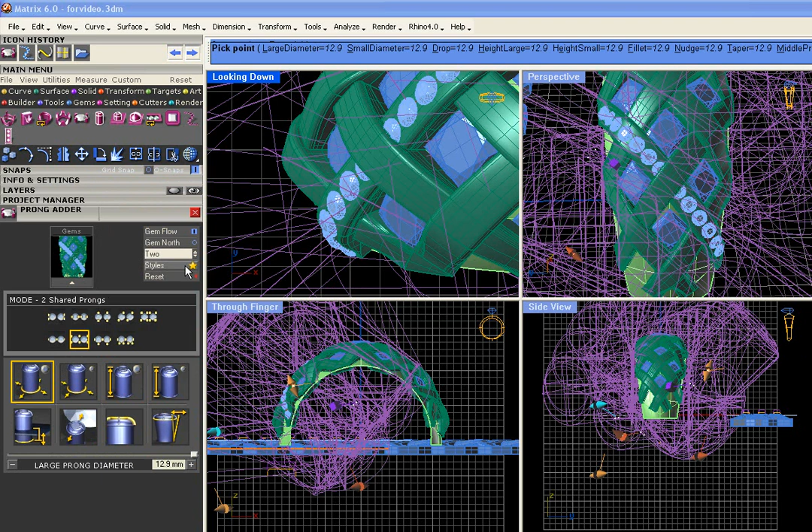And if they come out crazy like mine, I'm not really sure what happened, but if that ever happens, jump into your styles and apply one. That'll just give you something to start from that isn't insanity. I haven't really seen it do that since development, so I'm not sure — it's probably me, probably something I ingeniously thought would be a wise decision that wasn't.

Okay, so large prong diameter, and just lower this down. Make it something cute and tiny. We're going to get rid of those in the middle anyway, so press enter to add them. Wait just a moment while they appear.

And then we'll go in, take a look at the ones that are under here. Just ungroup — utilities, ungroup — and get rid of them: delete, delete, delete, delete.

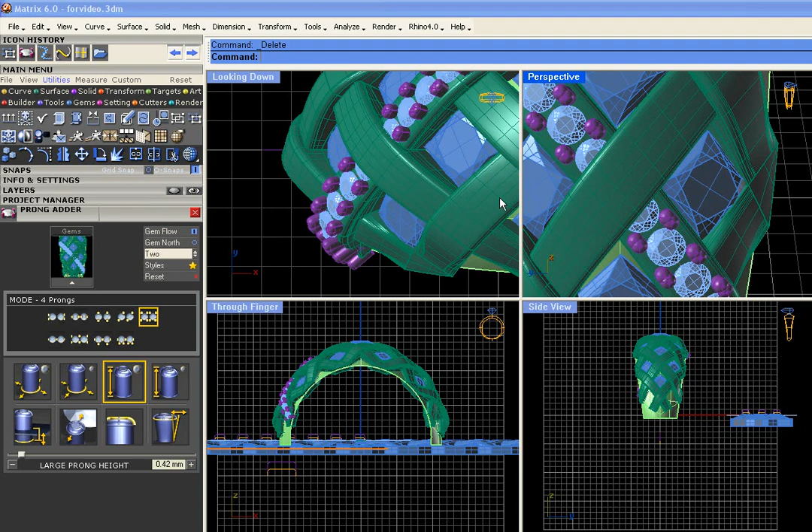And if there's any gems in there, which I don't know how that happened — I must have already deleted them. And obviously you will repeat that process for half of the ring.

Then, coincidentally, you can take all these and all these. I'm going to turn off history just in case it decides to wig out. Rotate and copy, F4, shift, shift. So once you do half the ring, please don't do the other half — just rotate and copy and you'll get the whole thing with gems and prongs.